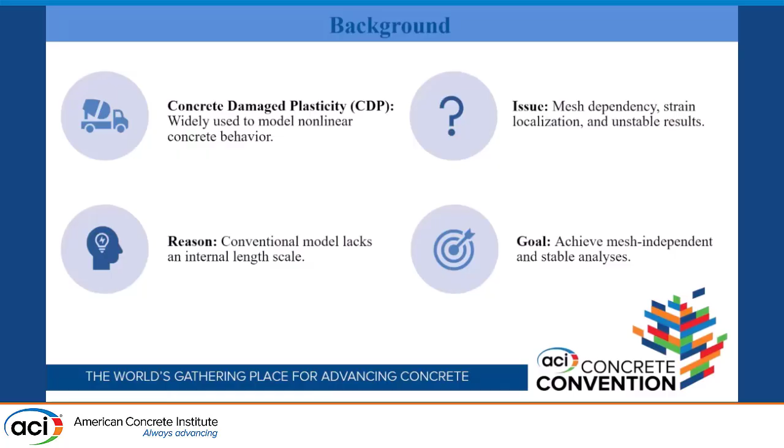So my goal in this area was to, first of all, understand what, for example, Abaqus is doing to fix this issue and why it was giving my colleagues a hard time, and then see if we can actually remedy the situation by some other methodology. This is the problem I was talking about.

If you have a strain softening material, physically, it may exhibit a behavior that you're seeing in this load deformation curve where some band of material may fail, which will cause the nearby material to unload, and then the strain will localize, like in slope failures and things like that, and you can get it physically. And that may not be a problem. That might be the physics you're trying to capture.

But your numerical model may give you artificial softening. When you refine your mesh, you nominally expect your finite element method to give you a better result. But if your result is constantly changing, like you're seeing in the picture here, as you refine your mesh, your post-peak response is changing, then it's going to be a problem.

Even if your objective is to capture the peak loads in a given structure, this is still a problem because your structure will not fail uniformly. Failure will be, again, localized somewhere. And if that failure is not correctly represented, other parts will get different loads than they would have. So even then, the overall load might be misrepresented.

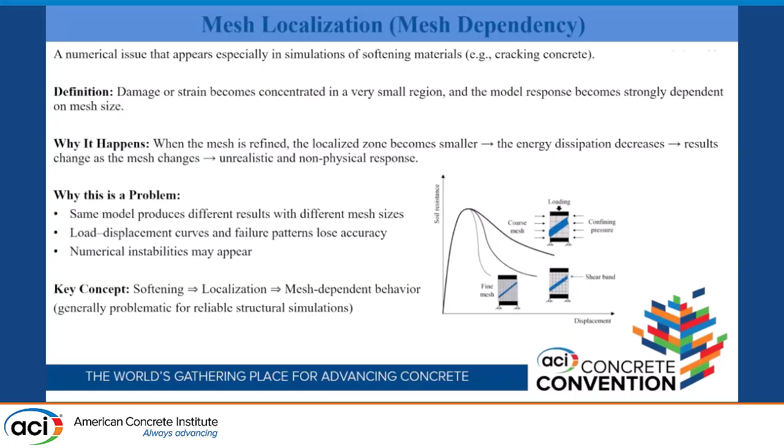I wanted to kind of explain this to myself, why this is happening. So I created this little model problem that embodies the phenomenon here of a strain softening material. Imagine that I have two rods, one at the top and one at the bottom, connected in parallel. And I use a certain mesh for the bar in the top, let's say 5 finite elements. And then I put another bar in the bottom to maintain stability in my model problem, my thought experiment.

Assume that all of the material that is involved in this model problem obeys this constitutive law, where the internal force in any one of the bars is related to the relative displacement at the two ends of the bars through that softening relationship. And let's assume that the bar above has a softening relationship, but the bar below is always linear elastic. So it always can carry any kind of load you can apply to it. It has infinite capacity.

So when you start loading this member, the load will be shared by the bar above and bar below. So the total load F of t will be just the sum total of those two loads, whatever the internal load is in F6, plus whatever the internal loads are, and they should be uniform. If you cut a free body diagram, any one of those loads, whether it's the internal force of member 1, 2, 3, or 4, they'll give you the same.

That should add up to F total. So let's, in our thought experiment, keep loading this. And let's assume that our internal displacement has reached a certain level in the members at the top, and then the internal displacement has reached another force level in the member at the bottom.

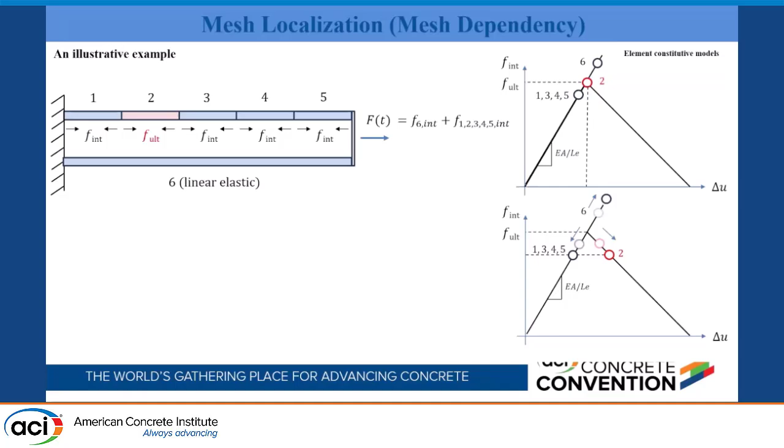But as soon as that reaches the other side, the other elements are going to unload. Yes, they are still going to have the same internal load. The loads are the same, but their deformations will be different. And once this happens, it is virtually impossible for members 1, 3, 4, and 5 to reach over the hump and go to the other side. So they're going to keep unloading.

So what is the overall effect of this? Let's just monitor what's happening to F of t versus the overall displacement that is experienced on the right-hand side. We're going to have a composite stiffness that you can see in the upper curve, and that composite stiffness will change when the first element yields. Let's say that's F2 in this case.

And then it is going to be a reduced stiffness because now effectively element 2 is contributing less to that stiffness. And it is going to continue on until element number 2 drops into the failure regime and completely breaks off, at which point all of the loads will be carried by the member in the bottom, F6. So the slope of that curve, the backbone curve, will converge to identically the stiffness of member 6.

So now you may be guessing why I put this member 6 in there, because I can subtract its force to see what's happening in the upper band. But let's just ask ourselves this question. Members F1, 3, 4, and 5 are related to their relative internal displacements through this relationship. They all have the same material, same length. And then, of course, they're all bounded above by F ultimate.

At this point, it's hopeless for them to ever climb back up to F ultimate anyway, but that is an upper bound for them. So this relationship tells us that as we reduce the size of the element, their stiffnesses are going to go up, and that is going to cause their relative displacements to go down. What that means is that they're going to move more rigidly relative to element number 2, and nearly all of the deformation that the upper chord experiences will be coming from element number 2. So its stiffness is governing what's happening post-peak.

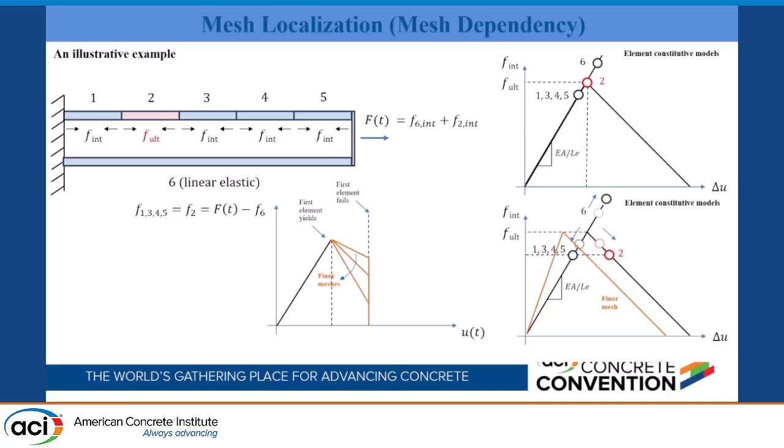And in this particular problem, this may not be an issue because you know the physics of this problem. It's easy to understand what's going on. You may not even need to do an analysis here. But imagine that this is a part of a huge structure, and this is a problematic corner of it. Now the load redistribution is all messed up. This is the problem. So Moffatt & Nichol engineers were suffering from this, and they were using whatever remedy was being provided in Abaqus. And I'll get to that.

But there are other more consistent methods. In fact, there are energy-based methods that will take the fracture energy, fracture toughness from a test specimen and apply some regularization to your mesh, adjusting your stiffness and damage parameters so you always get the proper response. There are more consistent plasticity models than the concrete damage plasticity model.

These are non-local gradient models, which will sample your strains not at a Gauss point, but at a neighborhood of the Gauss point so that they have an embedded length scale in them. So this averaging will alleviate this mesh dependency, etc.

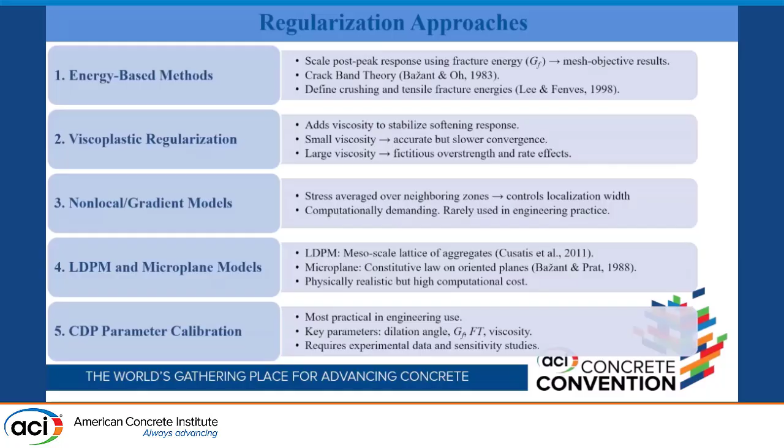So let's talk about the problematic model we have in Abaqus, because other models are not necessarily available in Abaqus. The one in Abaqus is called concrete damaged plasticity. We call it CDPM, I guess. It is based on a basic Drucker-Prager yield surface. But unlike a plain Drucker-Prager plasticity model, it carries on an additional damage parameter, which evolves based on plastic strains and whatever is happening when you reach the yield surface and do loadings

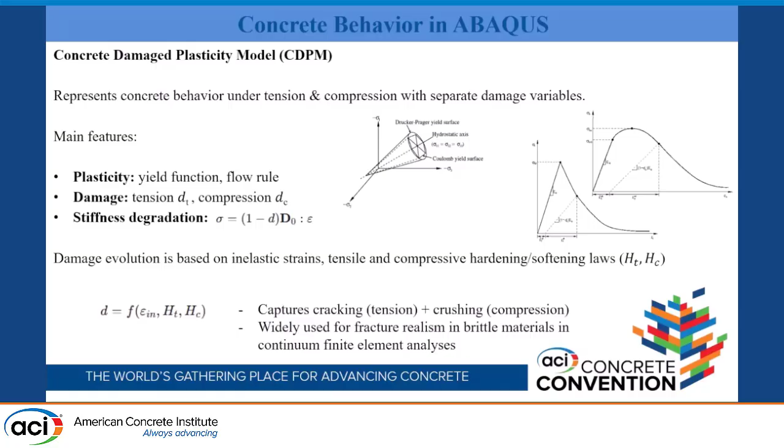and unloadings. This damage parameter is D, and it simply scales the effective stress that was nominally representing the undamaged material properties, hence the name damaged plasticity. It's not damage plasticity, it's damaged plasticity. There's a tiny nuance there, but once you see the equation, you clearly understand what they really meant by it.

So this model gives you strain localization, and Abaqus has created a viscoplastic fix for it. What Abaqus does is that they take on the conventional plasticity parameters, damage plasticity parameters, and then they convert them into viscous versions. And my little analogy for that is the little link at the top is the basic damage plasticity model. The little box is like a slider that gives you plasticity.

The spring is the elastic strain energy and all of that. What they do is they add a viscous dashpot, a viscous term in there, which gives you additional force. So if you're having problems, this force is going to keep things intact. But how much of this force, how would you determine it? It's unclear. That's what's giving my colleagues a problem. Like, what should we set the value of this parameter mu that controls it?

If you use too large of a mu, you're adding too much fictitious force and strength to your system. Not really strength, because if you waited long enough, presumably this will converge, but this is viscosity for you. And if you're using too little, you still have the mesh dependency.

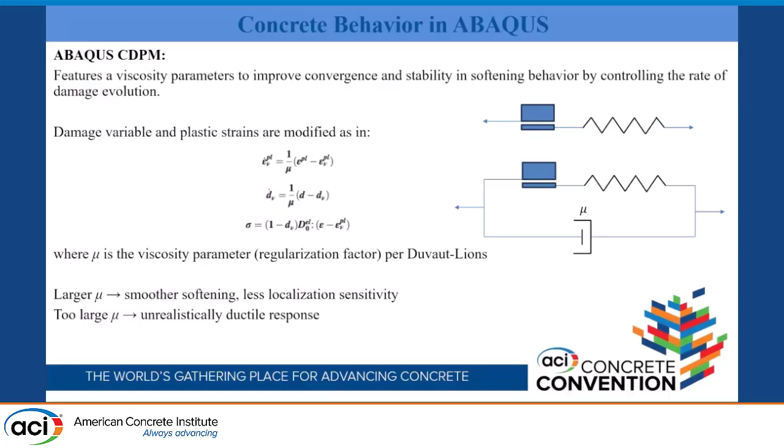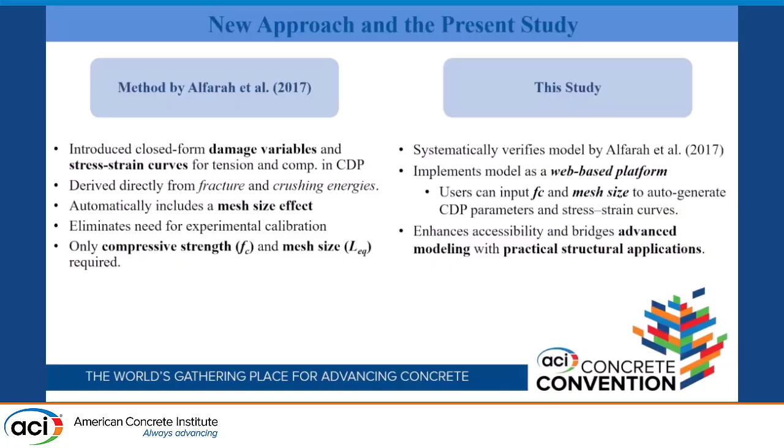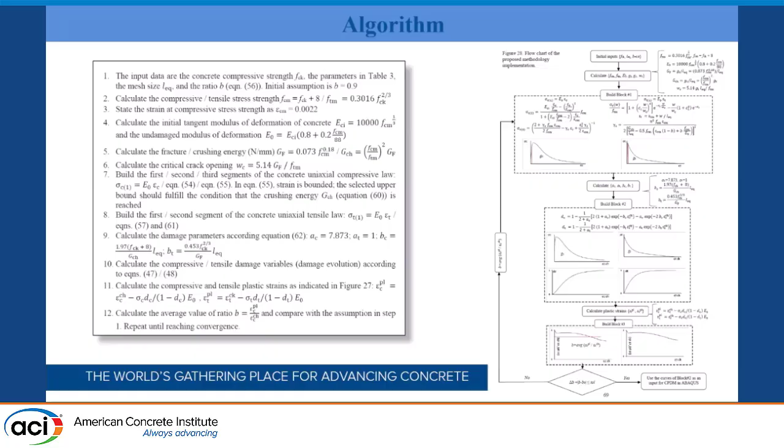So once I've identified the roots of the problem, I kind of knew it anyway, but I had to dig through the literature. Then we realized that there is a group who came up with a good remedy for it, and that's Sergio Oller in Spain and his group, student Alfarah. They wrote a fantastic paper that fixes this problem. So my contribution is really nothing except finding this paper and implementing it in a Python code, the algorithm for which is here, and I don't have time to go through that, but we can discuss it offline. And then, this fixes the problem.

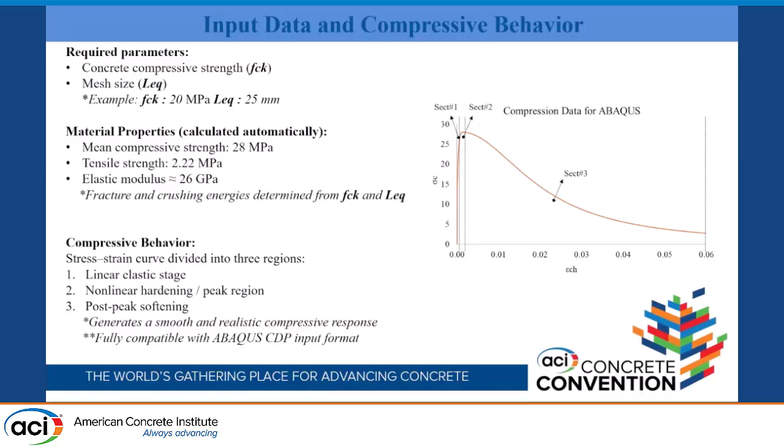All it needs is your concrete compressive strength that is obtained from a mesoscale conventional structural scale test, not a micro specimen, not a giant specimen of a dam, but like a regular sized concrete specimen. And then the mesh size you'd like to use with that strength. And then it automatically adjusts the rest of the parameters for Abaqus so that it gives you a mesh independent response. Again, I'm going to kind of skip through the details, but we have done some verification and validation studies.

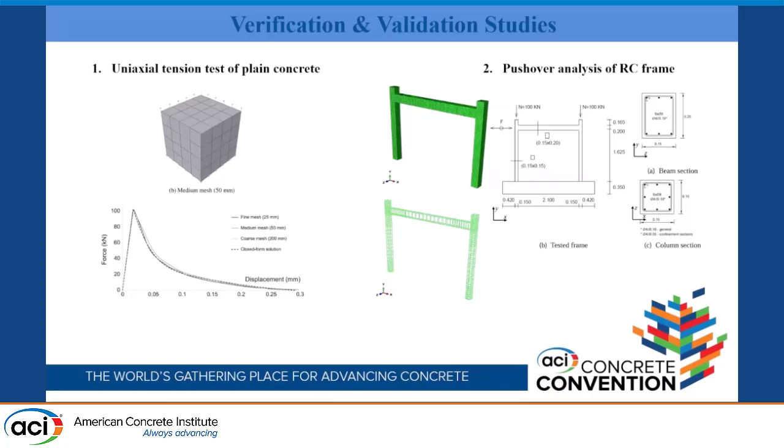The one on the left you're seeing is like a unit cube, which we apply uniaxial tension and shear and other things. And then we solve the same problem over and over again with different meshes with this technology and see if we always get the same result. If we do, this is really working. The one on the right-hand side is a more sophisticated, difficult problem. It's reinforced concrete, a portal beam, reinforced concrete frame. So there's a pushover test on that, and we try to capture those parameters.

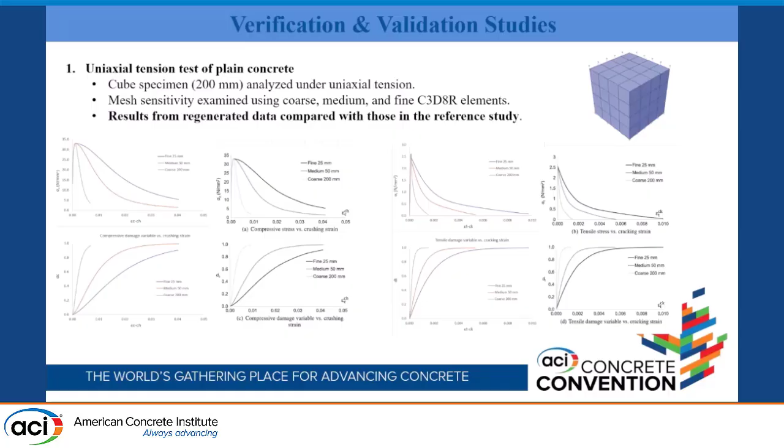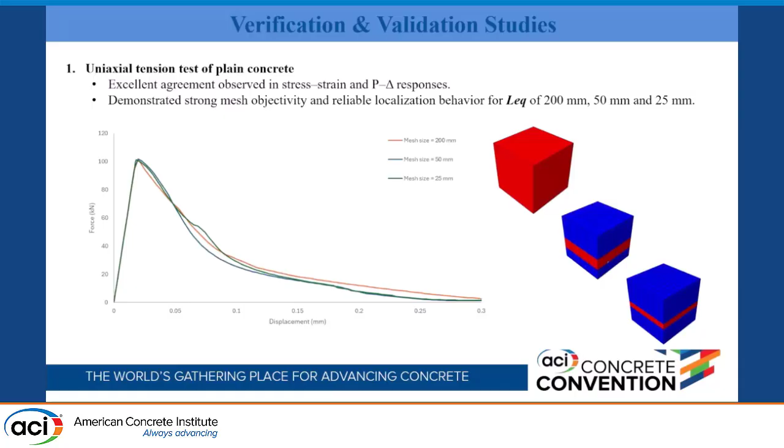So this is just us verifying ourselves against our colleagues who wrote that 2017 paper to see if we've implemented their algorithm correctly. And then here's us applying it to this unit cube problem with different meshes. And as you can see, we have solved the mesh dependency problem. I'm not showing the negative results here, but the negative results without the fix will cause the post-peak response to soften indefinitely. The more you refine, the softer it becomes. It almost collapses back onto the backbone curve.

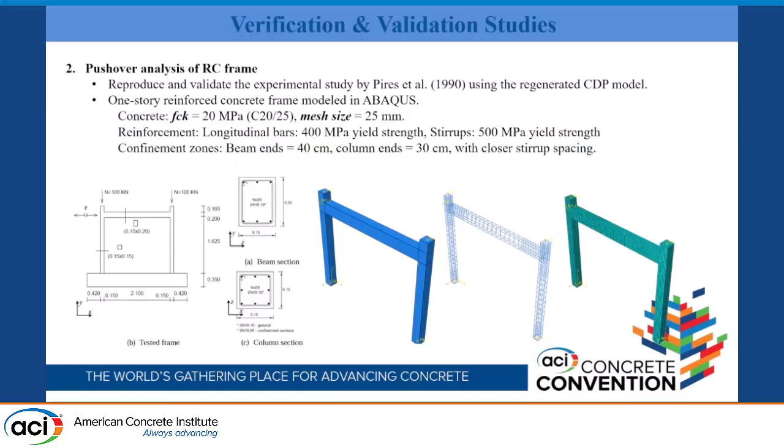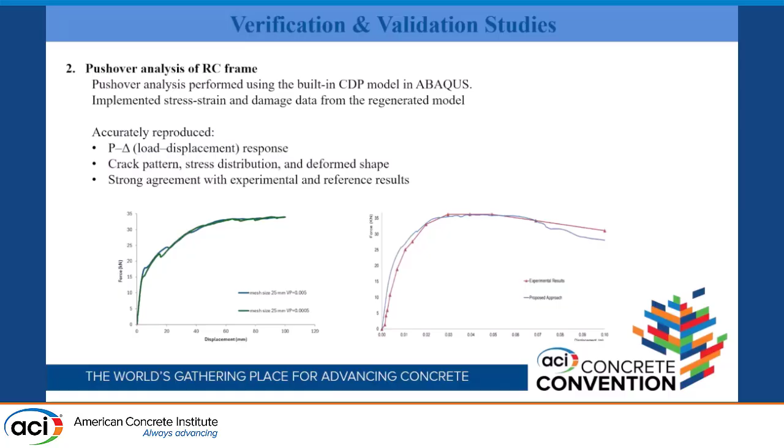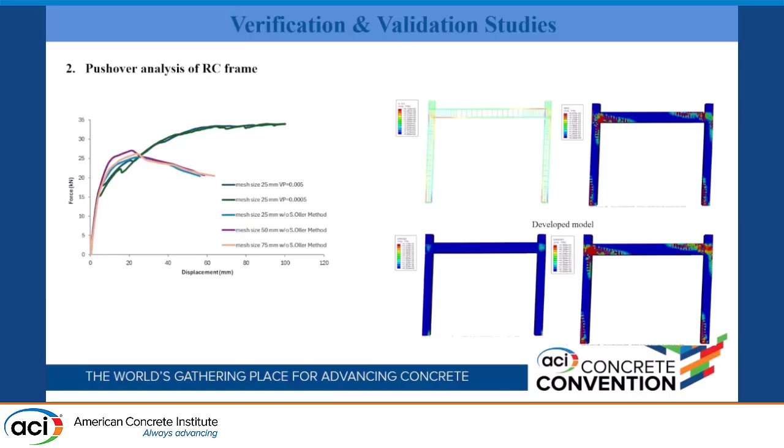This is the pushover analysis. This is the calibration. Experimental measurements on the right-hand side. Our model analysis on the left-hand side for different mesh sizes, with and without the use of this consistent regularization scheme we got from Alfarah. If we don't use it, it doesn't work. If we use it, it does work.

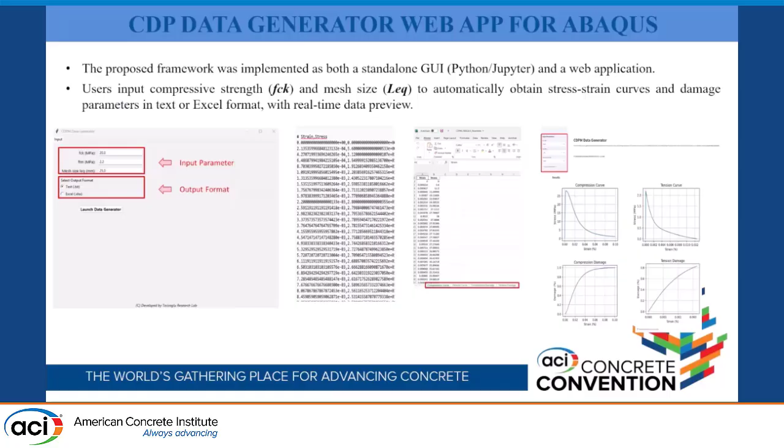Again, we've implemented it into a Python Jupyter notebook that has a graphical user interface. You put your parameters, your mesh size, and it generates your Abaqus CDPM input file, basically. You can copy paste it into your Abaqus document. And also we've created a web version of it. So if you have the web address, you can go there. You don't have to download or compile a Python code or anything like that.

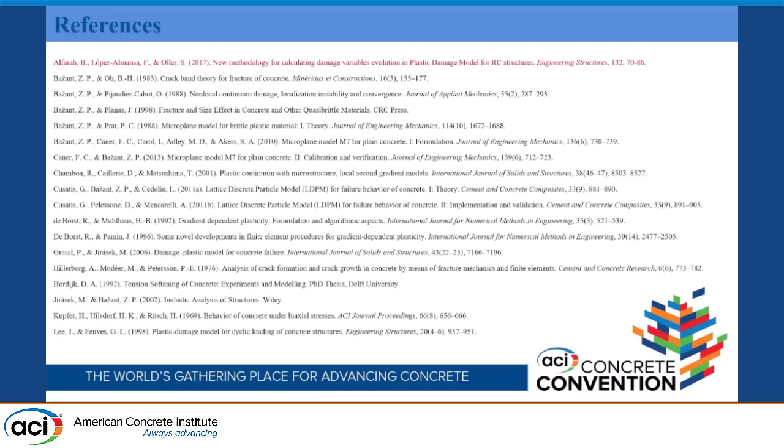And we're willing to share this with our colleagues. First and foremost, with our colleagues at Moffatt & Nichol, they're going to use it for different projects. But we want to share it with everyone who's interested in using the same kind of technology. So that's my presentation.